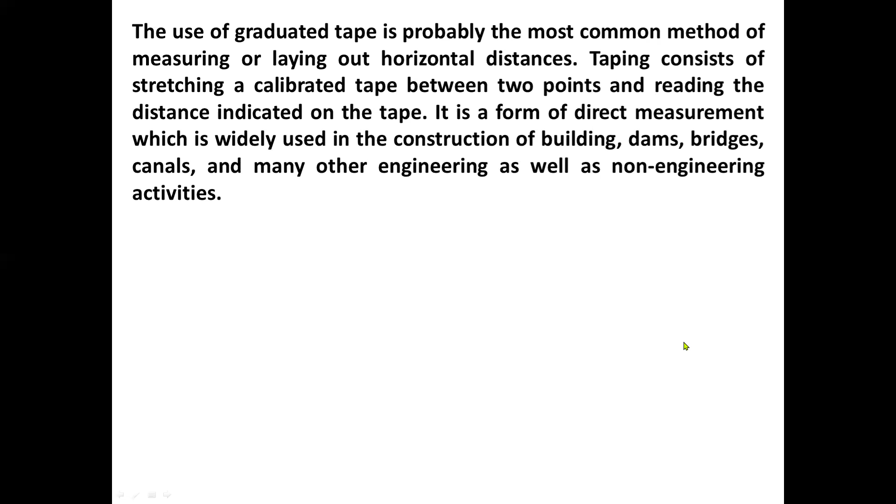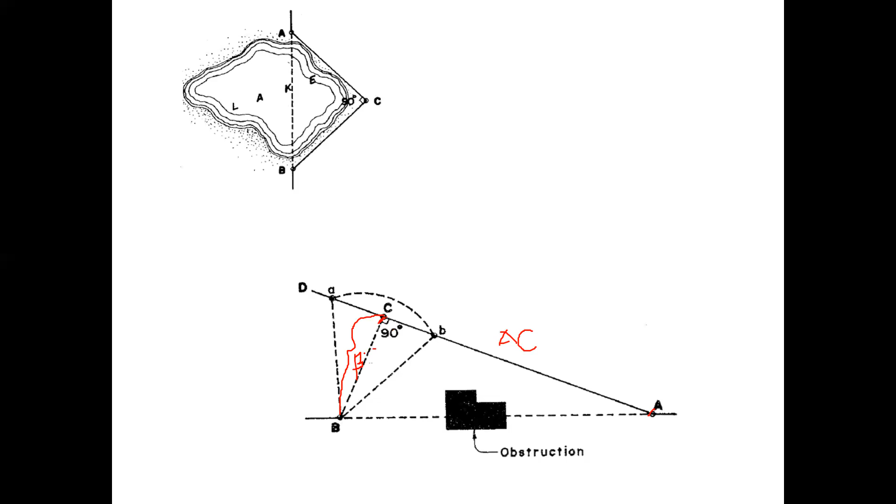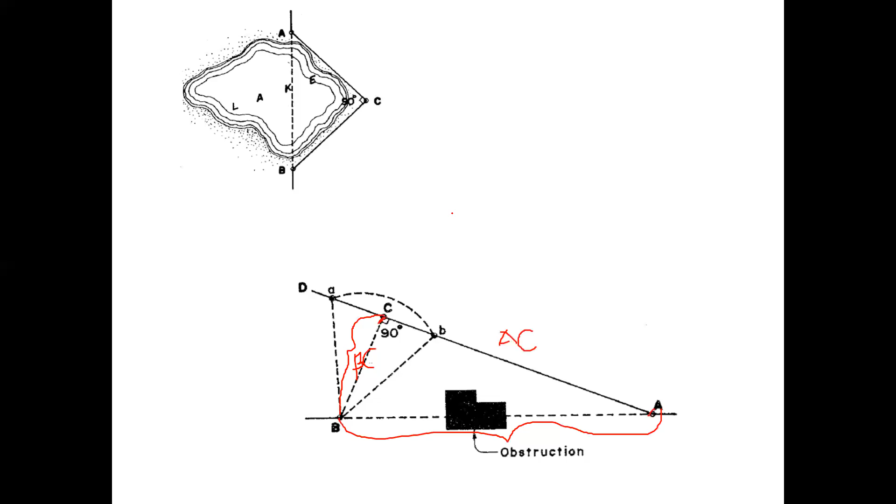So para mas maging klaro ang diskusyon kung paano ba i-apply ang swing offset method, ito yung mga kakailanganin nating materyales sa ating experiment, at saka yung mga aparatus. First, we have to use marking pins, a nylon cord, steel tape. I think in this situation, since 5 lang naman yung mga points natin, kailangan lang natin ng 5 marking pins.

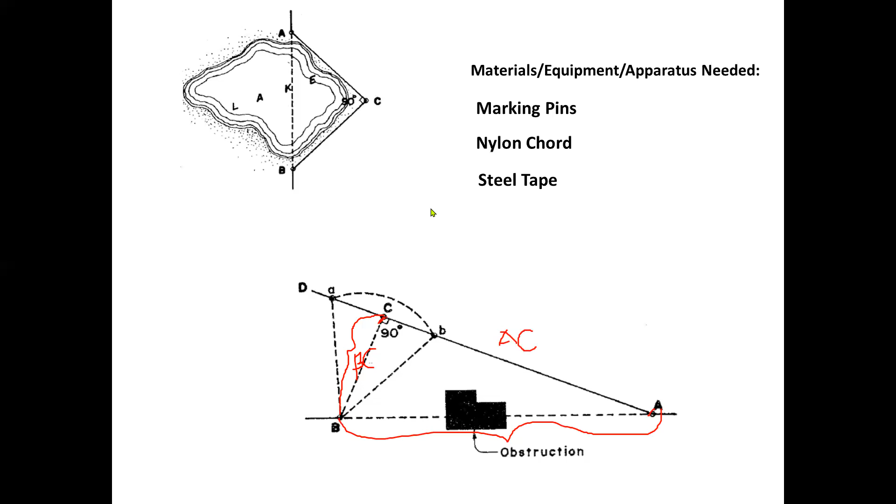Nylon cord, pwede na yung sinulid or yung netting na sinasabi sa Kapampangan. And then we have to use a steel tape. So of course, calculator, and of course, bond paper kung saan tayo makakalculate. And then ano yung kailangan nating i-recall na konsepto? Una, kailangan nating i-recall ang right triangle concept. Ano ba yung nalalaman na natin regarding triangles, specifically the right triangle?

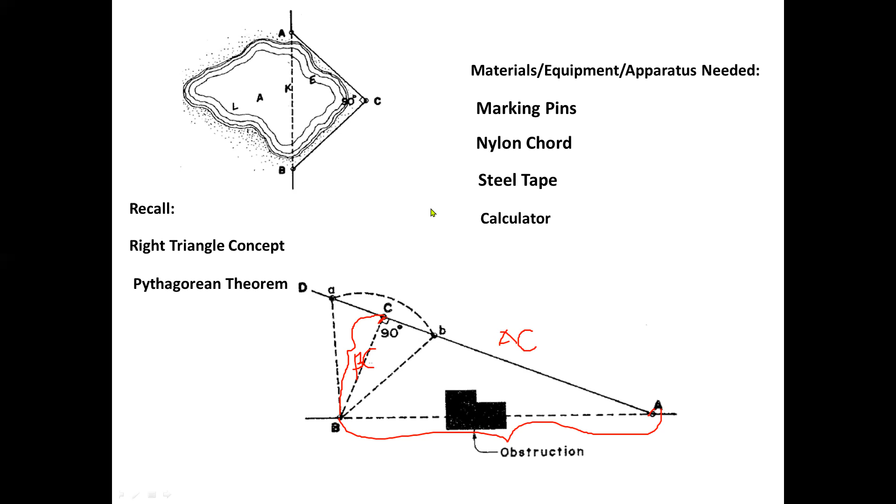And of course, we have to recall also the formula for the Pythagorean theorem since i-apply natin sa ating tinatawag na swing offset method that we use in determining the distance between 2 points when there is an obstruction. And to make it very clear, for the application of a swing offset method, assuming we have this obstruction again, and we need to determine the distance between 2 points, A and B. So kailangan nating malaman kung gaano kahaba yung distansyang yan na mayroong obstruction.

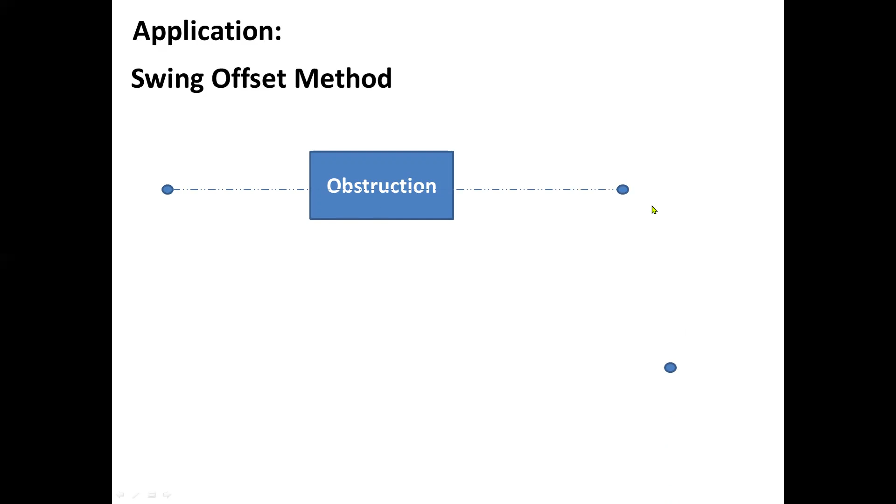All we have to do is to plot the third point na medyo lampas ng konti sa distansya, lampas dito. Yan, medyo lampas na siya ng konti. And then we connect these two lines, and these two points also. We connect these 2 points and another 2 points. All we have to do is to rotate this line, yung tansi natin. I think dito siya mag-stop.

If we're going to rotate it in a clockwise direction, yung lubid natin o kaya yung tali o yung nylon cord, we just stretch it and rotate it. Kung dito magtutugma yung dalawang line habang niro-rotate natin yung unang line, so let's plot it. So kunwari dito tumugma yung unang line natin, dito siya nag-intersect sa point na yan. And then coming up next, lagyan muna natin ng pangalan ang bawat point. This point, let's call it point A. That is point B. And this is point C. And that will be point D.

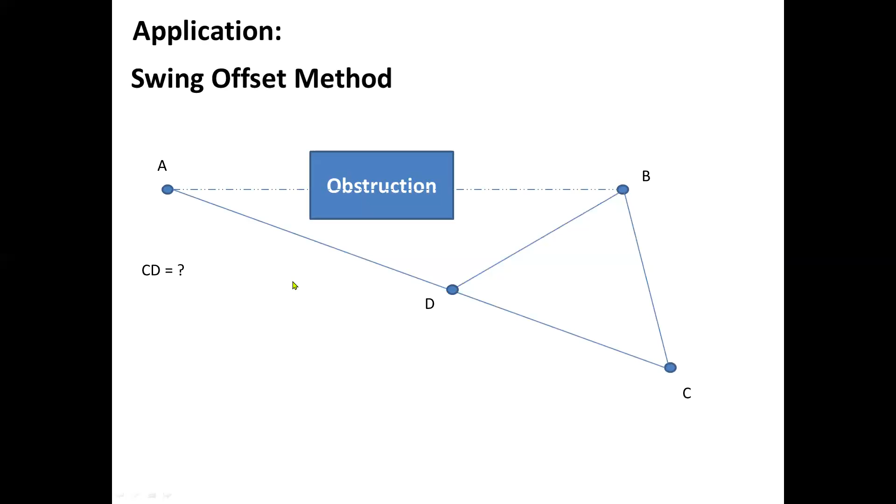The next thing to do is to measure the line segment CD. So after natin na-measure ang line segment CD, divide the measurement of segment CD by 2, and then locate the midpoint. Ibig sabihin from this point hanggang dito, magsusukat tayo ng kalahati ng line segment CD, kung ano man yung measurement na nakuha natin. Let's say for example, ang nakuha nating measurement ng line CD is 5 meters. So from this point hanggang sa gitna, magsusukat tayo ng 2.5 meters. And that's only assuming.

Now, ito na yung point natin. Lagyan natin ng pangalan na point E. And then we have to measure the line AE. Kung magsusukat na rin lang tayo, magsimula na tayo sa point A hanggang point E. So ano ba yung distance between point A and E? What is the measurement of line segment AE? Yan ang kailangan nating sukatin. The next thing to do, connect natin yung point E sa point B, and then saka din natin susukatin.

Pag nalaman na natin ang measurement ng line segment BE at ng line segment AE, kung saan ang dalawang line are perpendicular to each other, what I mean is ang line AE is perpendicular to line BE. Dahil perpendicular ang dalawang yan, may sukat tayo na angle na 90 degrees between the lines BE and AE. So all we have to do then is to apply Pythagorean theorem. By using this formula, we can easily obtain the measurement of line segment AB. Application of Pythagorean theorem.

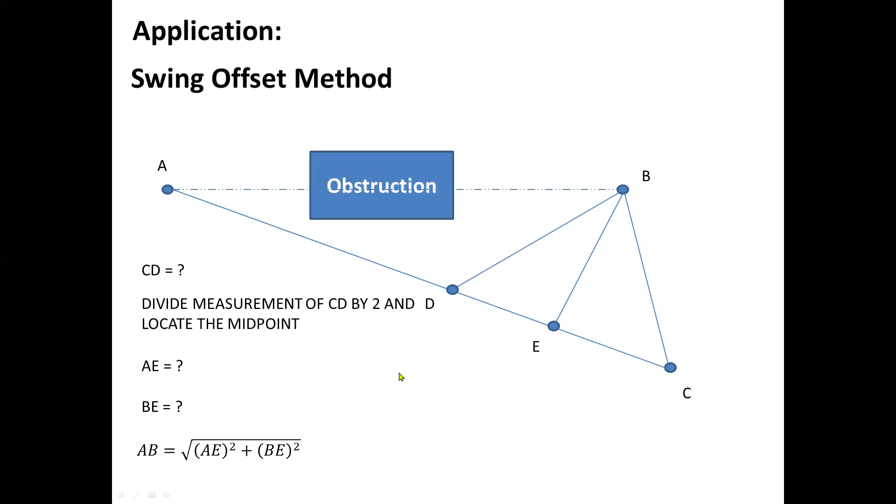And actually, you can do it in actual. Kahit wala ka man lang ng steel tape, kahit meron ka lang ng metro or medida, maaari mong i-apply ang swing offset method para mas lubusan natin itong matutunan.